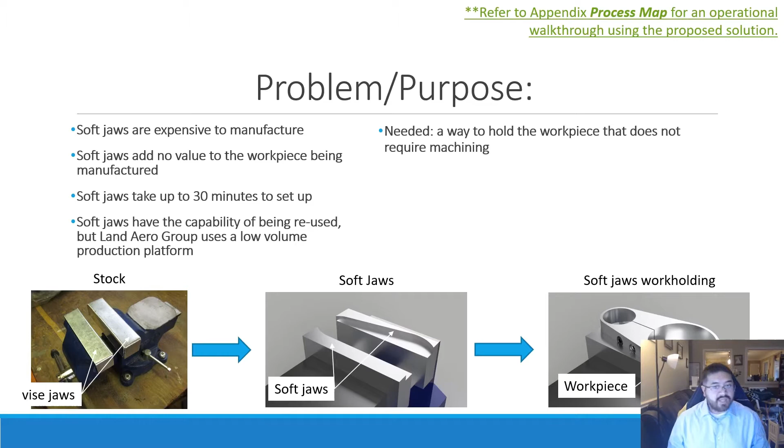We're going to kick off with our background. The problem we were presented with was that soft jaws were expensive to manufacture and add little to no value to the workpiece. Setup time is up to 30 minutes, and it wastes a lot of material, adding more expense, especially when fabricating custom parts or components. We needed a way to hold workpieces that didn't require constant machining and didn't waste raw materials and time.

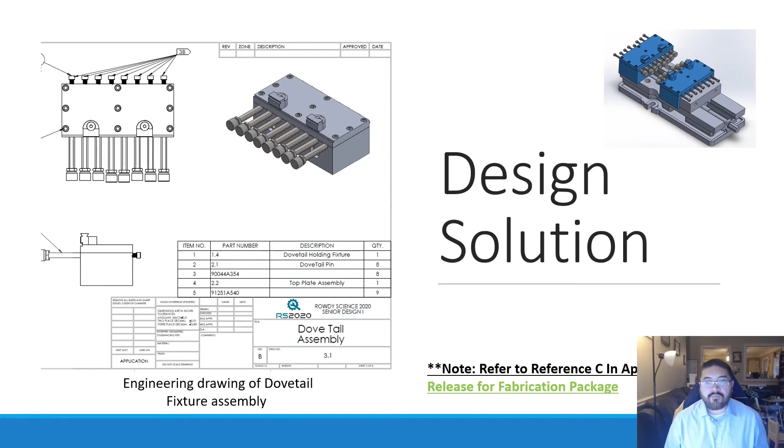Our solution was to have pins conform to a part's geometry as it's being manufactured in a CNC mill. The pins are pushed by compression springs and held in place with locking screws in the rear, which also offer additional force if needed on the manufactured part. Dovetails are utilized on the top plate for holding and alignment during the first operation, and just alignment in the second operation, since the pins will likely absorb the force of the vise and conform to the part.

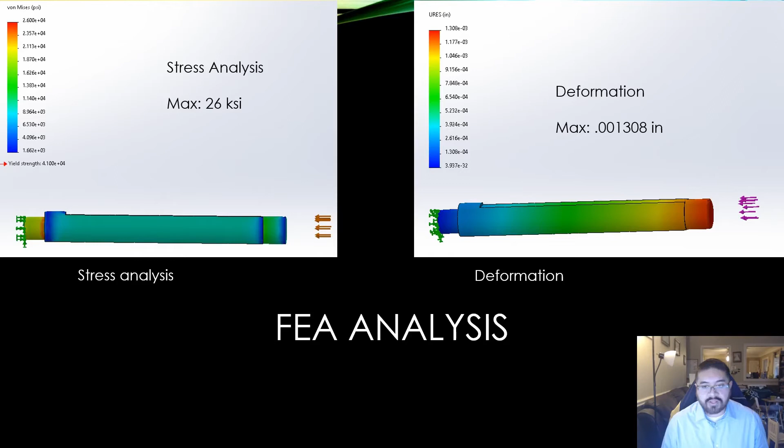In this FEA analysis done in SolidWorks, we assumed a single pin would see about 1,000 pounds of force, held in the rear. We chose carbon steel as the material since its yield strength is 41 KSI, while the maximum stress seen in the image is 26 KSI, and the maximum deformation is 0.001308 inches. This part was purchased from McMaster-Carr and was the most viable option, as other test materials would be crushed when compressed.

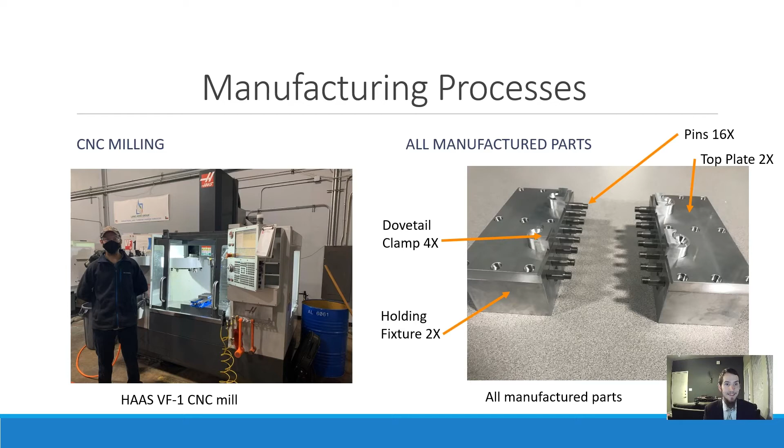All the non-commercial off-the-shelf parts were made on the Haas VF1 CNC mill. On the left, you can see the Haas VF1 CNC mill. On the right, you can see the custom parts manufactured for the dovetail fixture.

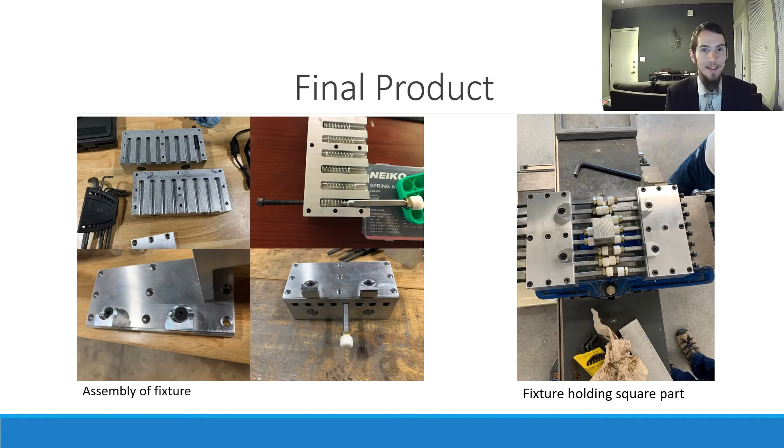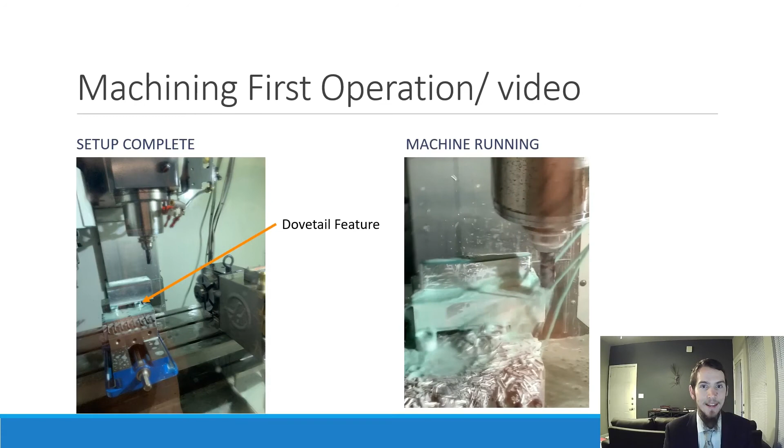Here is the first operation. The dovetail feature locates and clamps the workpiece during this step. Here's the CNC mill cutting the first operation, and here's a closer look at the dovetail clamp feature. Given that the dovetail feature is square to the axis of the machine, when it clamps onto the stock, it will also be square to the axis of the machine.

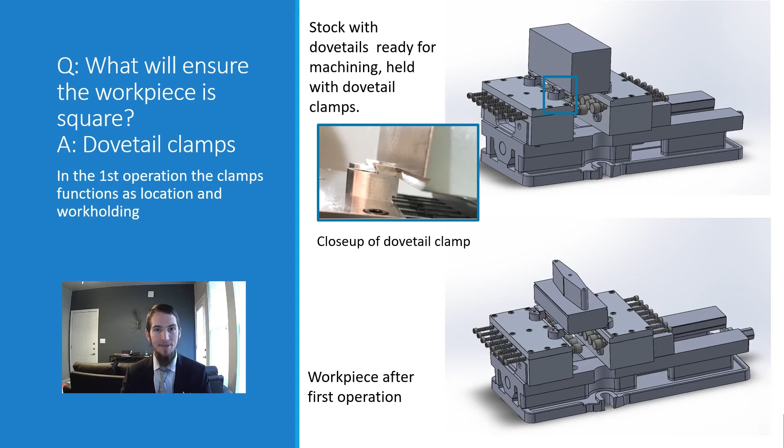Below you can see that the first half of the sample part has been cut out by the CNC machine. Machining a part on the CNC machine is sometimes like making a pancake: you make one side, then you turn it over and make the other side. Here you can see the first half of the finished part has been made.

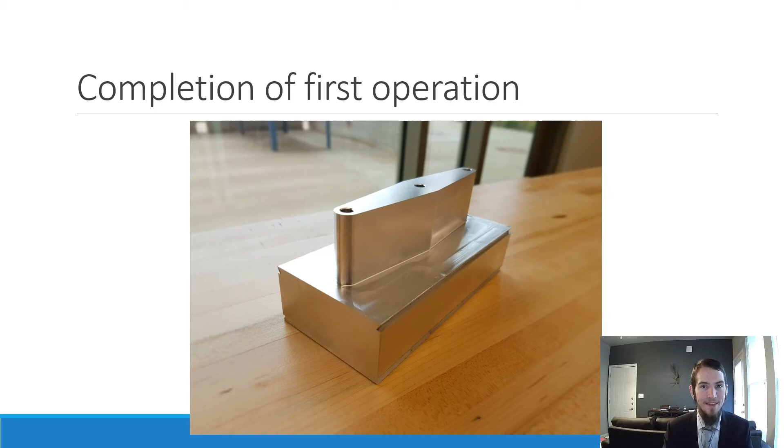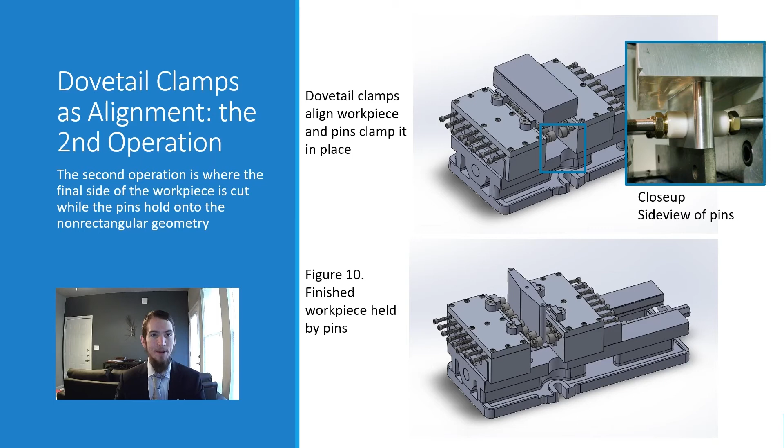It's time to flip it over and make the other side in the second operation. During this operation, the dovetail clamp locates the part before the pins take over and hold onto it. The dovetail clamps can be removed if they will be in the way of the machine's tool path. In the upper right-hand corner, you can see the pins holding the part of the workpiece that has already been machined.

The dovetail clamps have been removed and the workpiece is held in place by the adjustable pins. On the right, you can see the second operation of the workpiece being machined on the CNC mill.

This is the center of our design. The CNC fixture, which required no additional machining to create, is holding a sample workpiece that has non-rectangular sides. A workpiece like this could not have been held with conventional vise jaws.

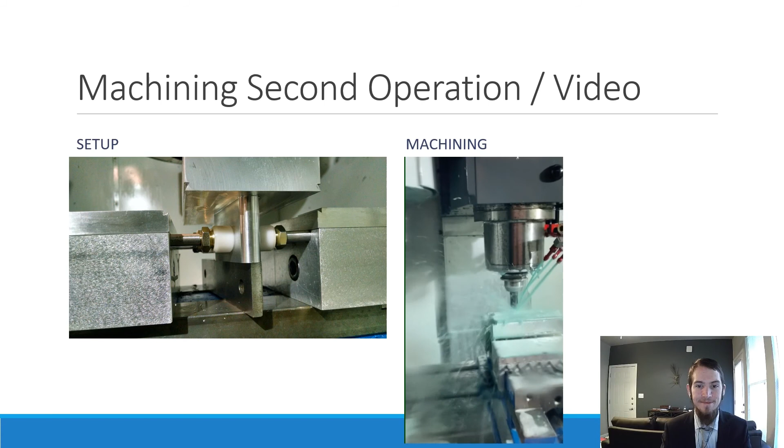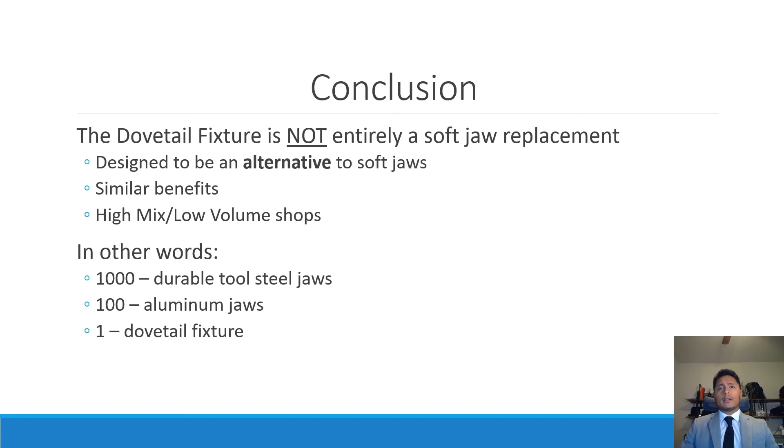In short, the dovetail fixture system is not entirely a soft jaw replacement, but rather an alternative to the widely used method within high-mix, low-volume shops, more so as an additional tool in a machinist's arsenal. So if a shop had to make 1,000 parts, they'd deploy durable tool steel jaws. If 100 parts needed to be made, maybe aluminum jaws would suffice, but if only one part needed to be made, then the dovetail fixture would be deployed.

Lastly, we'd like to improve in three areas: rigidity, flexibility, and automation of setup. During testing, a good amount of chatter and vibration was seen, and we'd like to mitigate this by implementing stronger materials, limiting the range of motion of the swivel feet to the z-axis, and using shorter pins. To increase flexibility, we'd like to implement adjustable dovetails, and add ball screws into the locking screw mechanisms to facilitate setup even further.